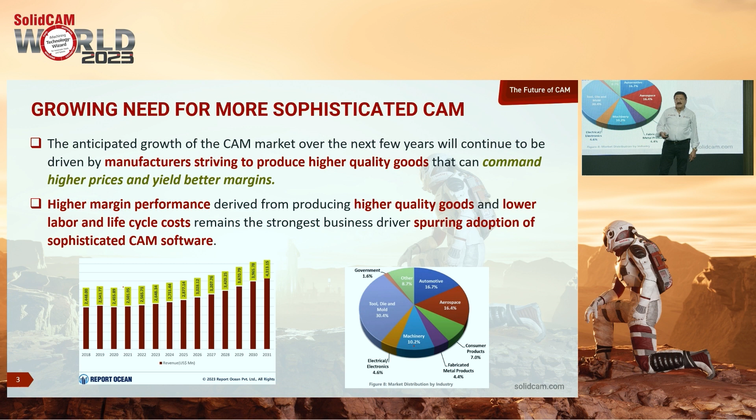Now, higher margin performance derived from producing higher quality goods and lower labor and life cycle costs remains the strongest business driver spurring adoption of sophisticated CAM software. That's why all your CNC machine shops will have to go on this trend of having sophisticated CAM software to be able to produce better quality goods. So to get higher quality and greater margins, they will need sophisticated engineering and machining, and this will require sophisticated CAM software, both for design and manufacturing.

Another issue here, the scarcity of experienced engineering and machining personnel in most developed economies, all of you suffer from it, you can't find people. You have the need to capture knowledge and automate as much of the machining process as possible using CAM software. This is 3D iMachining, templates, this is the automation, all the feature recognition and machining we have in our software. By the way, I didn't change a single word, I'm just taking these sentences from that article.

So basically, this growing need for more sophisticated CAM from the technology side, what does this mean? We already mentioned it the whole day yesterday. The continued increase in the use of multitask machine tools. Second, the growing demand for physics-based cutter path strategies. I will explain what they mean, and you'll see it's iMachining.

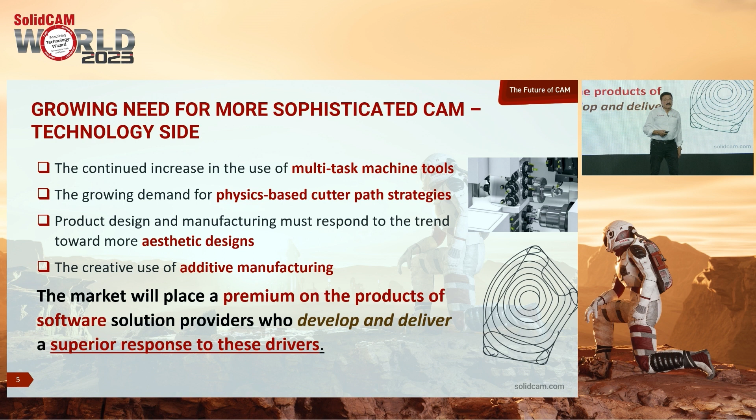Next, product design and manufacturing must respond to the trend toward more aesthetic designs. Today, designers are making things more fancy because people like fancy cars, fancy consumer goods, so they have to get nicer designs. And last but not least, the creative use of additive manufacturing, which obviously we are doing. So the market will place a premium on the products of software solution providers who develop and deliver - it's not enough to develop, you have to sell it, deliver it, and support it - a superior response to these drivers. SolidCAM is doing that, we'll see how.

Okay, first, complex machine tools. Machine tool complexity and capabilities continue to increase, driving the need for more sophisticated CAD/CAM software, to create NC programs required to synchronize - remember, multi-channel synchronization - their complex capabilities and to optimize their usage.

The introduction, acceptance, and support of multitask machine tools is the dominant trend in the industry. If you didn't believe us, believe CIMdata, they check the whole market. This is the trend. Performing multiple operations such as milling and turning on a single tool in a single setup typically results in the benefits: increased productivity, faster turnaround, reduced scrap, improved part quality, by avoiding errors in transferring components from one machine to the other. They are described in SolidCAM.

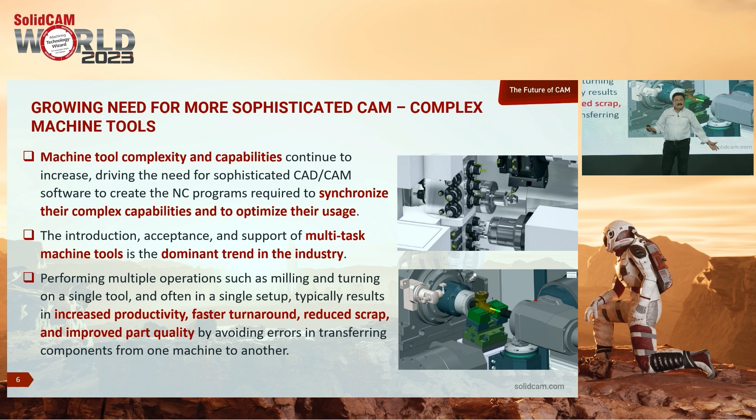While more capable, these tools are becoming increasingly complex to program and use. So to support complex machines, it's not easy, it becomes complex to program and use, so specialized software is required. Special software called SolidCAM, I add myself, is required to effectively use these multitask machines. The software defines the tool movement, simulates the operation - simulation very important, as we said - and post-processes the output. In the end, we have a post-processor for these machines.

Simulating movement is extremely important for an operator to visualize the machining sequences. SolidCAM for operators, right? The machining sequences avoid collisions and optimize the operation.

CAM software must provide individual control of each turret, synchronization again, produce accurate cycle time calculations. Sync and wait marks must be added. These are added automatically in SolidCAM to obtain the desired concurrent operation.

Other softwares like Mastercam, others who don't have good support for Swiss - what they do is generate separate programs for the different channels, and then they add this sync and wait marks manually on the controller.

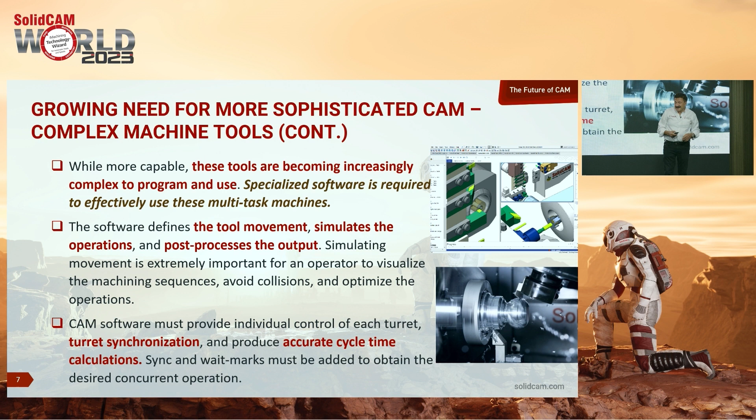To program the multi-spindle, multi-tool capabilities of a multitask machine, it is common for the cutter paths to be programmed in the CAM system independently - not so much independently, we do it in SolidCAM together. They are then synchronized automatically by the CAM system.

That's what SolidCAM does - manually by the programmer, or a combination of both. What they are saying is after we give you the automatic synchronization, you could do changes. This is the additional manual things.

When executed on the shop floor, the machining begins with the sync codes orchestrating the program flow of each channel. This is done automatically in SolidCAM. NC programmers can verify the NC program and their sync codes before using them - obviously, this is our simulation.

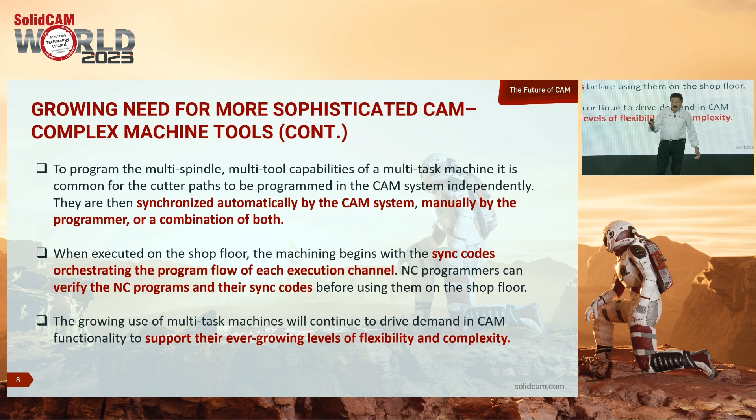The growing use of multitask machines will continue to drive demand in CAM functionality to support their ever-growing levels of flexibility. They are flexible and complex. SolidCAM supports them. Now we come to the second thing.

What does it mean, physics-based cutter path strategies? They say end-user demand for cutter path strategies with tool motion dictated by physics-based analysis is a dominant trend in the industry. These physics-based strategies are designed to produce highly effective and efficient tool paths.

On the right, this is iMachining. Significantly reducing machining cycle time - that's what iMachining does - extending tool life, and improving part quality. Now comes the next sentence, exactly describing iMachining: most of these physics-based strategies excel when machining hard materials. That's what Ken Merritt was showing us, cutting titanium and other very hard materials.

Now we come to traditional tool paths. Most traditional cutter path strategies are based on the geometry of the shape. These are the offsets that you use to do all the pockets and everything, based on the geometry shape of the area to be machined, plus one or more geometric properties like step over, for example.

Physics-based cutter motion strategies, on the other hand, are based on the way a cutting tool progresses through the material. That's what iMachining does - every point when we progress, we do a different calculation.

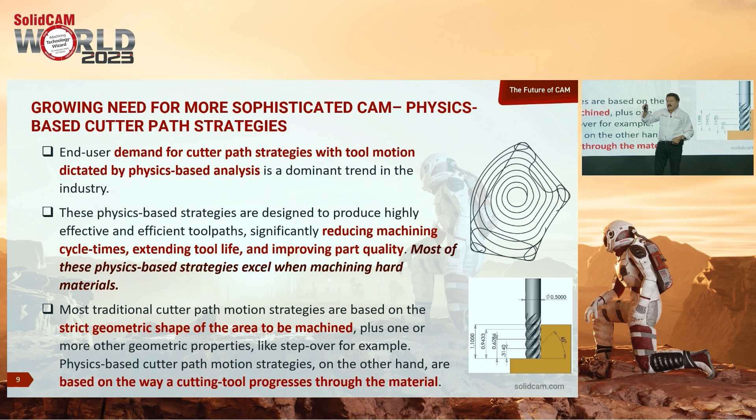The step-by-step definition of the tool motion considers the area from which metal is to be removed and how the material being cut changes through the various machining stages. The resulting motion evolves by looking ahead to see what is coming up and modifies feeds - that's iMachining - step-overs, and cutting motion in response to the ever-changing material condition.

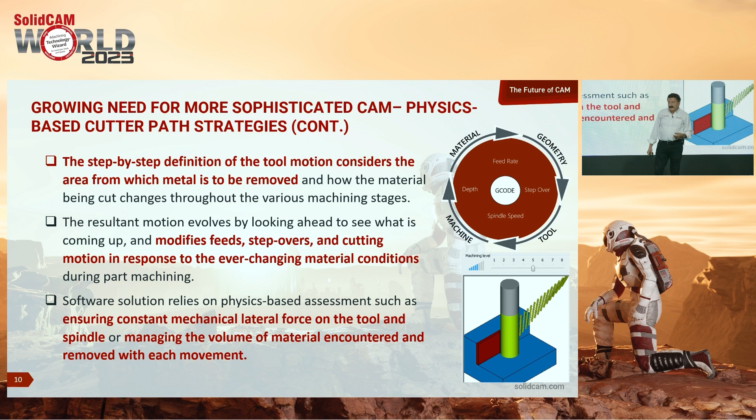I think these people just worked with iMachining and wrote all this. The software solution relies on physics-based assessment, such as ensuring constant mechanical lateral force on the tool and spindle - like we said, constant force on the spindle - or managing the volume of material encountered and removed with each movement.

Now comes something else that exactly describes iMachining. Another criterion that may be employed to determine tool motion, speed, and feed is to assure that the heat generated in the primary shear zone is primarily carried away in the chip - and this is iMachining, all the heat goes away with the chip - minimizing the amount of heat conducted into the workpiece, so the workpiece doesn't have all this heat.

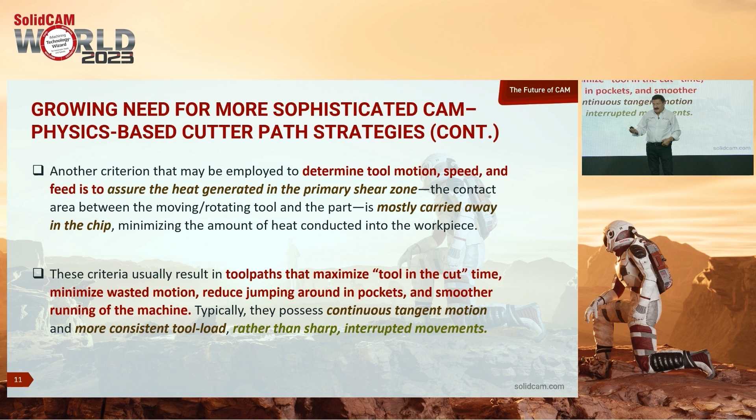These criteria usually result in tool paths that maximize tool in the cut time. That's what Ken was saying - you have nearly no rapid movement, minimizing wasted motion, rapid jumping around in pockets, and smoother running of the machine. Typically, they possess continuous tangent motion - this is iMachining - and more consistent tool load, rather than sharp interrupted movements.

So you believe now that when we say we are the future of CAM, it's here. We have already done all these things that people think sophisticated CAM needs.

Parts are becoming more nice and complex because of the need for aesthetic product design. The trend for more aesthetic design involving increasingly complex shapes continues to drive the need for CAD/CAM software that can model complex shapes in SolidWorks and create sophisticated, efficient NC programs in SolidCAM. Use of analytics to create more optimal part geometry, like generative design, is also producing non-standard shapes requiring more sophisticated CAM programming and machine tools, such as multitasking machines. So the more aesthetic design there is, the more you'll need SolidCAM and SolidWorks.

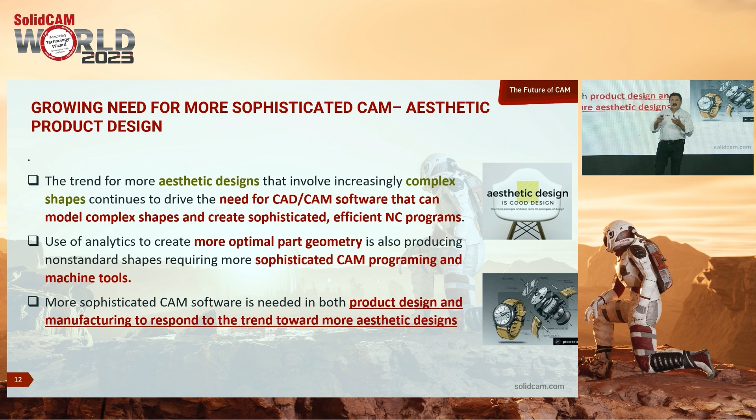Another important thing is additive manufacturing. The improvement in additive manufacturing techniques like desktop metal and binder jetting is having a growing impact on the CAM market. 3D printing offers an increase in product design complexity - you can print something you could never CNC, which increases demand for more sophisticated subtractive CAM. Through generative design techniques, which are trending now, we create shapes that couldn't be made using conventional subtractive CNC machining, or are too costly to make with CNC only.

So then comes the solution: 3D printing and subtractive CAM are often used in a complementary fashion. That's what we do, they wrote it. The 3D printed components form a base that requires subsequent CAM operations. That's what we saw in the movie - we print, sinter, and then we do the machining.

Why do you need the machining? To create threads - we saw it in the movie - remove support material, break movable parts free from the surrounding matrix, right Jörg? That's what you do all the time. Or create a required surface finish, that's what we saw also in the movie, to put the inserts there.

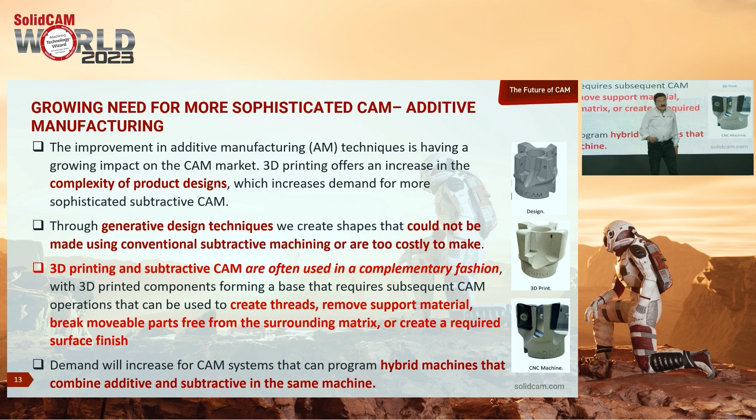Demand will increase for CAM systems that can program hybrid machines. Remember I said we are going to support hybrid machines - those that have both a milling head and a laser head that combine additive and subtractive in the same machine. Now I'm going to show you some beautiful slides from our software that does that.

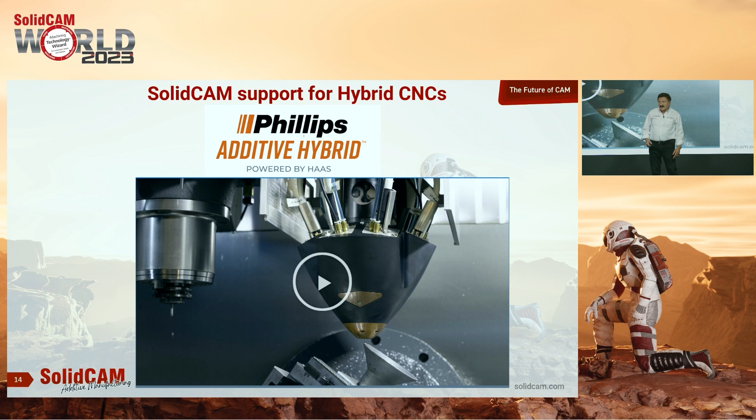As I said, a hybrid machine here - Phillips is the biggest Haas reseller in the world. They are in the US, and they created a special branch called Phillips Additive Hybrid, where they take a Haas machine and add to it a Meltio laser head from Spain, this amazing product. So it becomes a hybrid machine, and we are going to do the support for it. Let's see some slides from our software.

In this case, you see this is the part that has been CNC machined, but you want to add this tube spine to it. You can't CNC it, you have to 3D print it, right? Let's see a few more slides from our software.

You now have in our software special operations for this type of additive manufacturing. There's an operation called area laser-aided operation - I won't go into details, we don't have time. There's also a geometry laser-aided operation, and a multi-layer laser-aided operation.

Alex Miaznikov here is responsible for this project. Alex.

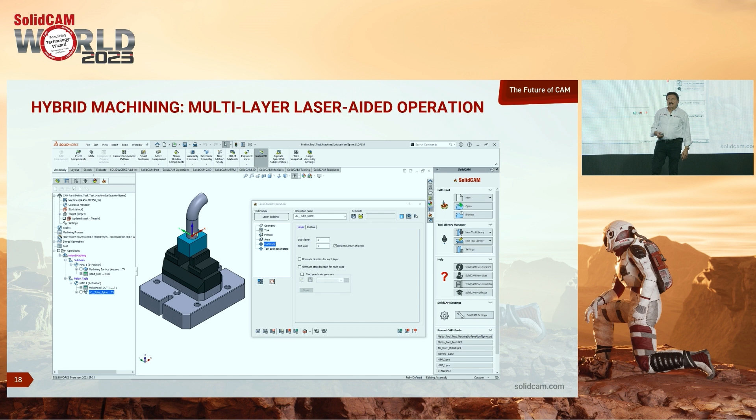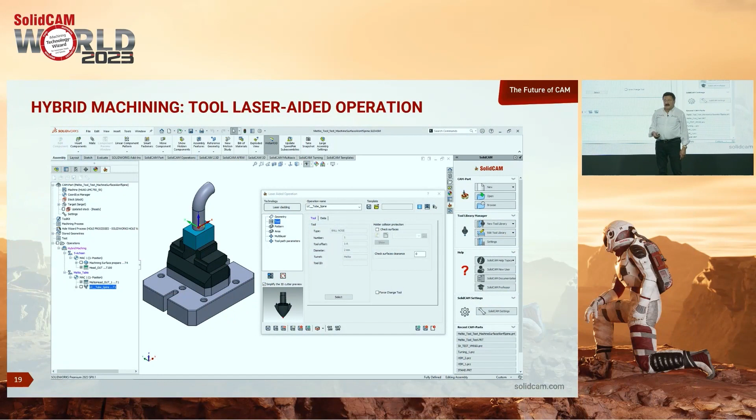Tool laser-aided operation, pattern laser-aided operation, toolpath parameters aided operation - and this is the end result. You see the simulation. This is the tube spine that has been 3D printed and added to the CNC machined part. So again, you see on the top right, the future of CAM.

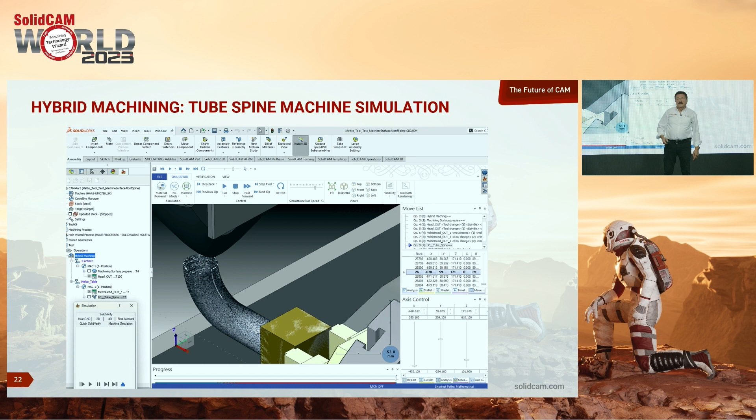India is still cheap, you could manufacture in India. Manufacturers in North America and Western Europe have recognized that further automation is needed to overcome the advantage of low labor economies. Supply chains, as well as logistical costs, benefit from basing manufacturing close to the consumers. Onshoring also reduces risk in the supply chain and eliminates time delays. The onshoring trend will accelerate with the strategic nature of some products outweighing dollars and cents.

So, SolidCAM is sophisticated CAM. Onshoring is bringing more business. So, let's do it. Thank you.